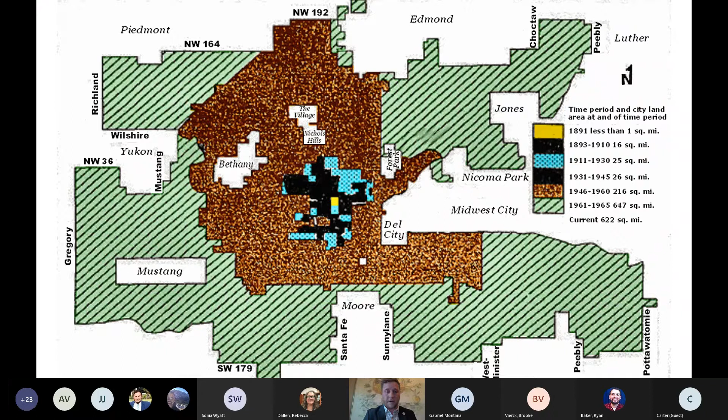So it's not an accident that we're this big. Apologies for the pixelated old graphic, but this is one of the best ways I've found to show that we grew at a pretty fast rate, particularly in the 60s. We started as that little yellow dot in the middle, and due to our tax structure, which forces cities to rely on sales tax or consumption as a primary revenue source, we reached out and gained more than 400 square miles. We added an area bigger than the city of Fort Worth over about four years in the 60s, in order to preserve that tax base for the future and ensure enough revenue to keep up with city services in a very fast growing city.

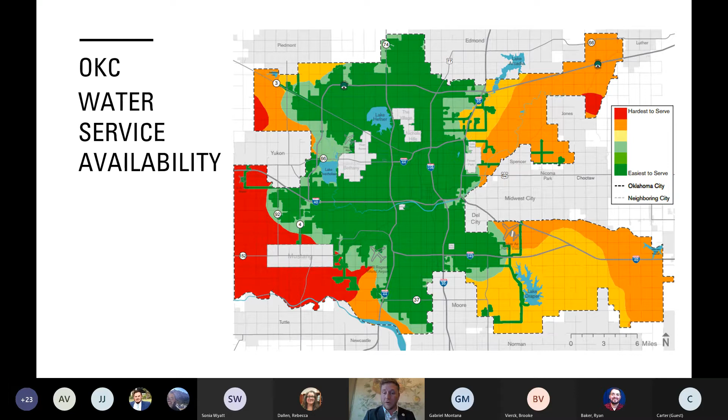This is just showing that information in a different way. Our population density increased to a point where we needed to expand the boundaries, and then continue to do so again, to preserve that tax base. These are really important features, but they also created challenges. It's a positive thing for development, having ample land where people can live on various sizes of lots in different lifestyles they prefer, whether in a rural area or a very urban area within Oklahoma City. But it does present challenges, as the red and orange parts of the map show. It's not easy to provide basic city services to that entire footprint, so with more development happening on the periphery for a variety of reasons, it definitely stretches those resources.

It's important to note how we get our water, tying into availability. We pump water from hundreds of miles away to make sure our population centers have enough, both within Oklahoma City and for the general metro area. It's a very energy intensive function, and in fact, one of the most energy intensive functions of the city is pumping and treating water. So having energy efficient operations is always preeminent, and having clean water available for drinking is especially important.

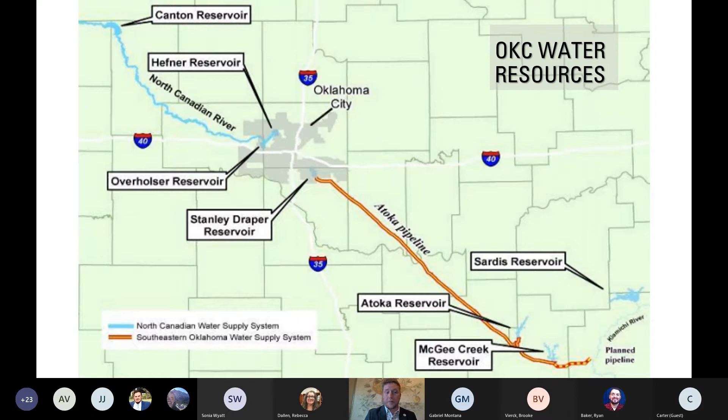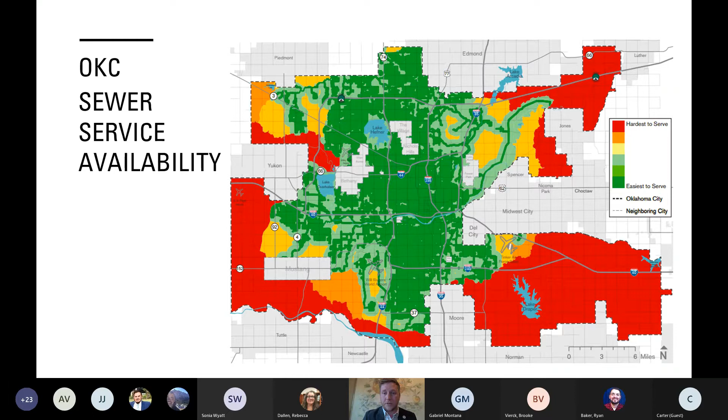Our water resources are not only concerned with pollution that happens within the city, but pollution across the state and the state regulations that guide that. On the other end, our sewer service is arguably even more difficult to reach in the other parts of the city. In those red and yellow, orangish areas, development is happening and a lot of septic systems are going in. A high concentration of those without proper education and maintenance can present very challenging water quality issues in the future. These are things we're aware of, monitoring, and want to be sure we address going forward.

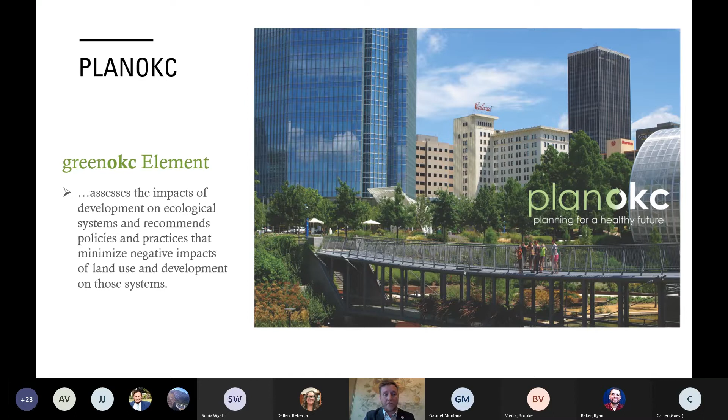These maps came from Plan OKC, the city's first new comprehensive plan since 1977, adopted in 2015. It set forth broad ideas about development and how it impacts our ability to provide services. The Green OKC element in particular we call out, because our office is mentioned specifically in terms of addressing some of those policies. We're also undergoing a larger code update, which I'll reference later with more detail, to help make our municipal codes more consistent with the vision of Plan OKC.

We chose to call this Adapt OKC partly because Sustain OKC was already taken as an element of Plan OKC, but mainly because adapting is a dynamic process. We're looking to constantly improve and refine our approach, not just sustain the resources we have, like clean air and clean water, for future generations, but create conditions where future generations can thrive by adapting to changing conditions.

To underscore the importance of having a plan like this, Moody's Investors Service issued a white paper in 2019 noting that without one of these plans, it results in greater state and municipal debt to finance recovery and adaptation to an increasing number of very high dollar events. These are billion-dollar climate disasters that have happened within the state of Oklahoma, and the trend line is going up, meaning more events that cost more money.

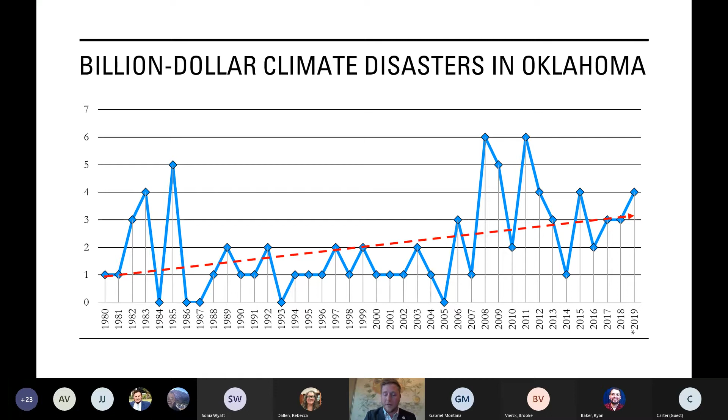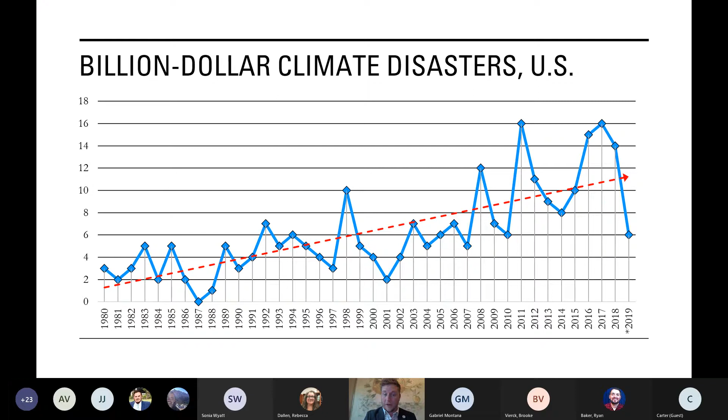I have specific examples of those coming up in a few slides, and I'm sure most of you on this call have these top of mind if you're from here. But it's not just a challenge for Oklahoma, it's becoming a challenge for the entire United States, a trend happening because hurricanes, straight line winds, drought, and even tornadoes now occur in areas where they typically don't, and very damaging tornadoes at that. We're all reaching toward that same pot of recovery money, both to build our communities stronger as a preemptive measure and to recover. If more of these keep happening without proper preparation, it could create very challenging conditions for each state trying to recover on its own.

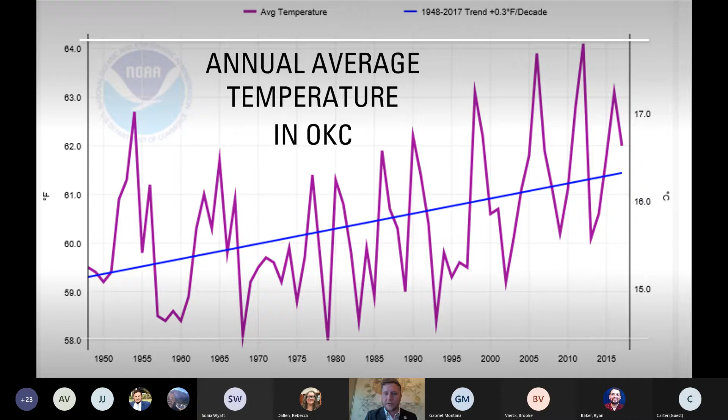But here, the report that the city was provided shows that we could have a range from anywhere from 2.6 degrees to 5.2 degrees increase in the high emission scenario by mid-century.

And so what this translates to is a number of days that we reach more than 100 degrees, or extremely hot days. We could see somewhere between 20 and 30 more days, another month of extremely hot temperatures.

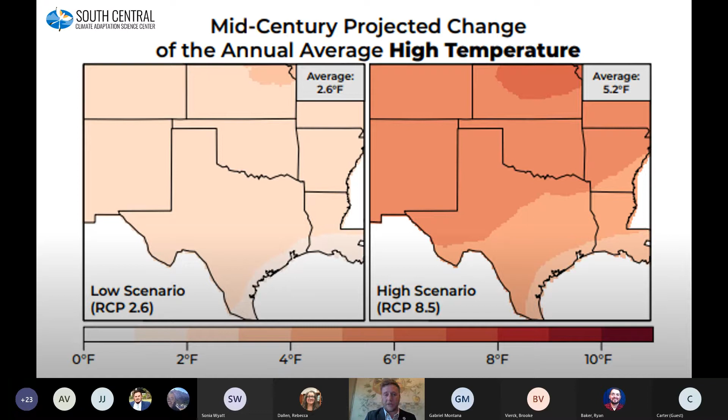And so that affects water temperatures, that affects our drought conditions if we're not getting precipitation at the same rate. And so that becomes a very challenging situation to keep up with.

It increases demand for electricity, causes hazardous conditions for people working outside. And again, this is just the translation of that to the number of days. So they're looking at somewhere between 15 to 30 plus more days of temperatures greater than 100 degrees.

So again, it's important to note that an increase like this doesn't mean that we'll not have any cold weather, as evidenced by last February's Arctic snap, but we do expect to see quite a bit more extreme record-breaking heat and longer, drier summers.

With that, I don't have a slide here for precipitation, but they're projecting about the same amount of annual precipitation. However, that's going to be underscored by being spread out in different parts of the year, and it may happen in more inundation events. When you have a warmer atmosphere that can hold moisture, it can hold more of it for longer, and then it all falls at once.

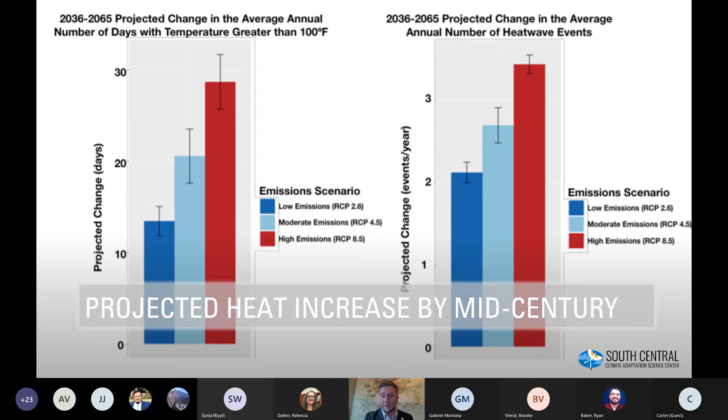And so those are things that contribute to the other primary hazard that was identified going forward, which is flash flooding. And again, water quality issues and certainly floatables associated with that. So I mentioned the impervious surfaces and parking lots being a giant contributor to that.

We have a tremendous amount of impervious surfaces in our city. And part of that, one policy mechanism that contributes to that, is our minimum parking requirements for new developments.

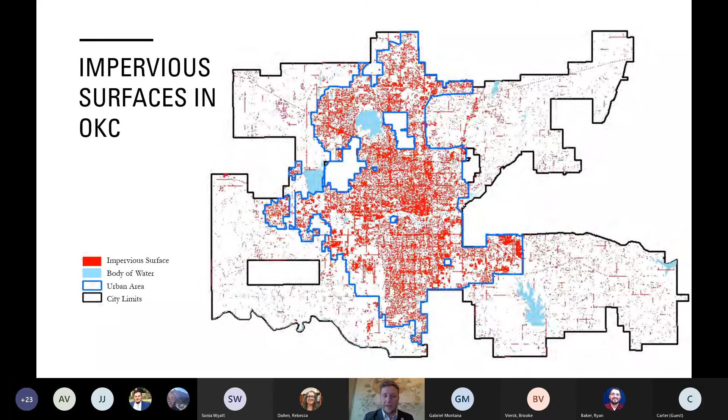So everything has to be built for that Black Friday day. And then the rest of the year, the parking lot is sitting there largely empty and contributing to both the urban heat island effect and flash flooding and stormwater runoff that definitely contains contaminants.

I'm sure most of you on the call are probably familiar with the terminology of urban heat island effect, but it's effectively where the temperatures in an urban area with a lot of pavement, a lot of buildings, rooftops, all these things that are absorbing heat and thermal energy throughout the day, slowly releasing it throughout the night. So also increasing the temperatures at night, but it also affects suburban residential and the periphery as well.

So as our urban and urbanized footprint starts to grow, so does this heat dome that can range from anywhere from 5 to 10, or 15 to 20 degrees warmer in terms of how much warmer it feels.

So again, people waiting for buses, vulnerable populations that are particularly sensitive to heat - those are things that we want to be aware of. And other cities have started to make moves on things like cooling centers and things that can be accessed by the general public to seek relief in those days.

And again, there are people in our community that don't have or can't afford air conditioning. And you can't imagine living in Oklahoma for very long without air conditioning. So being able to support everyone that lives here throughout these conditions is going to be a very important feature.

So the first chapter of Adapt OKC that I'll be talking about is the natural and built environment chapter, where we do talk quite a bit about stormwater quality issues, low impact development, and our natural resources.

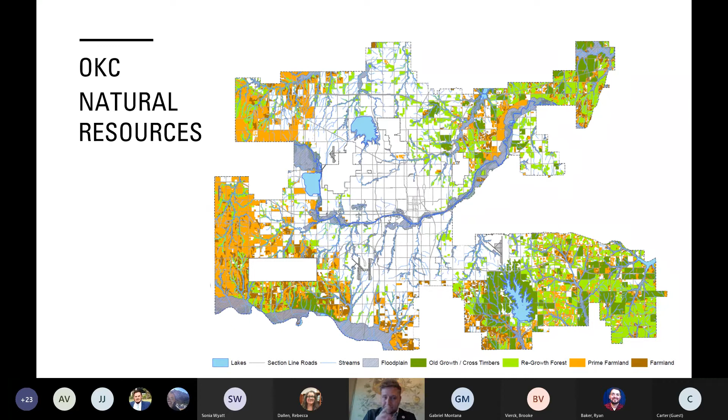And so this changes the way that water behaves on the land and contributes to higher volumes and a stronger velocity for our stormwater. So that creates challenges for engineers to deal with, particularly site by site, but also on the city side. So as we start to see more of those inundation events and flash flooding, again, we have examples here of just large parking lots.

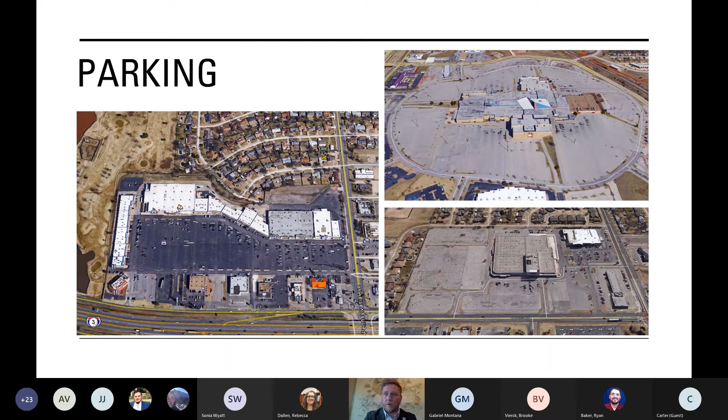Some of these you may recognize. The uses have changed from when they were originally built, but that didn't instantly change how big the parking lot was or what it's contributing to the community. So these all exist, and hopefully in the future some policy adjustments can be made so things are right sized, and developers can have other options too, so it's not just hard impervious surface as the only way to do parking.

And again, this is probably preaching to the choir, but nutrients, over fertilizing lawns - this is a huge thing already with outdoor irrigation, and sometimes with irrigation that's not well monitored.

One thing I'd like to point to - I know you all heard from Mallory Gotcha this year with the Squeeze Every Drop program and water conservation, but this is just an opportunity to point out the resources they offer. I believe OSU Extension is involved in these as well, to conduct basically a checkup for sprinkler systems. So businesses, residents, everyone's encouraged to do this.

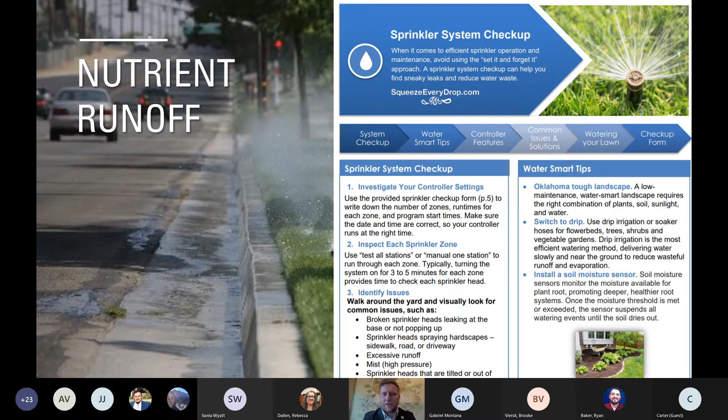But again, a very important consideration, given that heavy rainfall events and flash flooding also contribute to these, but irrigation does it more regularly. And so when you have a tremendous amount of heat, you have really long, hot days.

And again, this is something you're all very familiar with, but the blue-green algae blooms - it's probably a dirty word in this forum to even bring up. But when you have runoff from polluted areas or with a lot of fertilizers, and then you have long, hot, dry summers, which we're projected to have more of, you can have more conditions that are right for blue-green algae blooms. These can create health issues, recreation challenges, and also impact wildlife.

So the contribution of these large parking lots, connecting with a large amount of heat and more stormwater runoff from flash flooding events - we have some conditions coming in the future that we may want to be prepared for.

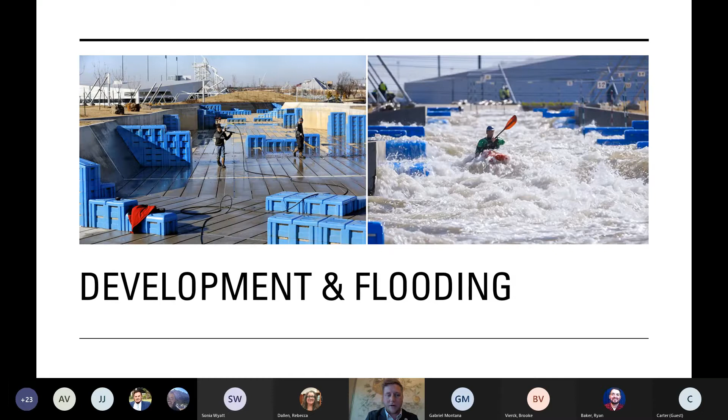Water flows normally without these big blocks, but we put them in there to create whitewater conditions. The same thing happens in the real world where we have too many impervious surfaces or high concentrations of them, so it moves the water faster and creates much more dangerous conditions. In fact, so dangerous that the fire department uses this as swift water training for some of their firefighters. So it's an analogy that stands there.

I mentioned low impact development. This is a concept that we've talked with Derek about quite a bit, and we're looking at ways we can both provide guidance to private developers and look at ways they can be incorporated into city projects, to help not just prepare for what we're experiencing today, but what's to come in the future. So a whole menu of options here.

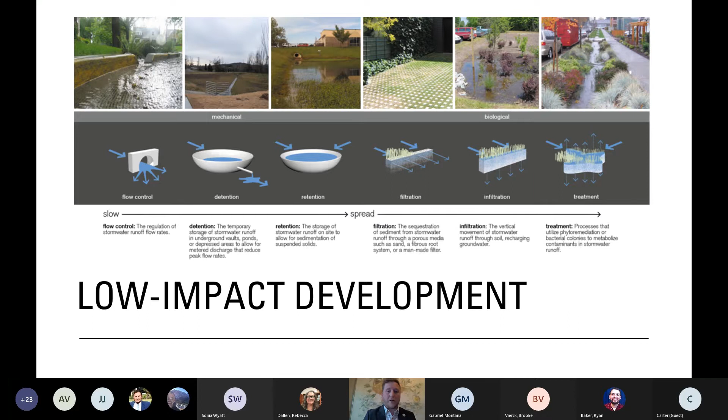It's not just rain gardens, and it's not just using pervious paving and things like that. It can be other strategies of detention or flow controls, infiltration - just wherever water can be slowed down and then allowed to filter using the plants to help clean it. This can help us stave off some regulatory challenges that can become very costly and time consuming, but then also keep our waterways healthier by not over inundating them with nutrients.

Low impact development, in fact, has been something the city has talked about for quite a while. We have dating back to 2009 with the Green Infrastructure Task Force, which members of Public Works and several other departments and external agencies were part of. Just highlighting from this some of the primary issues and concerns identified in that report - it pointed to stormwater discharges, untreated runoff directly connected to storm sewers, these types of challenges, and that still stands today. So we're going to be looking to work together to address those, and then expand the options developers might have and that the city would have in how we deal with stormwater.

A good example, parks down at Kitchen Lake incorporated something where they have a nice little rain garden / bioswale with an under drain, where all of the water from the circular parking lot there - and again, this is at Kitchen Lake, so just off the photo there is an actual lake where people can go out fish and interact with all the things.

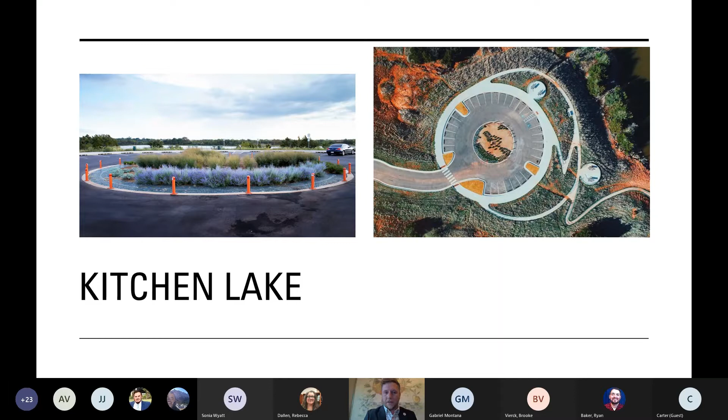But the important part is most of them are driving there. This is not exactly a place you can walk to very easily—it's a little bit further south. But when they do drive, the cars are at least not contributing directly to runoff straight into that lake and causing other challenges. So again, a really good example of something the city's done that we hope to see more of.

Other primary considerations from the Natural Built Environment chapter that directly relate to stormwater is, of course, our tree canopy—the expansion and preservation of what we have. And as we start to see these weird unseasonal ice storms, like the one last October, that damaged a tremendous amount of trees due to all the vegetation that was still there, it's important to know what the status of our tree canopy is.

One study funded by the Oklahoma City Community Foundation and Oklahoma Forestry hired Davey Resource to do an iTree analysis. This only covered about 3.23 square miles within parks land, assessing 134 different city parks. In the grand scheme of things, this is a very small area out of a 621 square mile city. However, the benefits those assessed areas are providing are tremendous—the trees are providing upwards of $43,000 in environmental benefits, both from the carbon they sequester and the stormwater, totaling up to about 3.6 million gallons of avoided runoff.

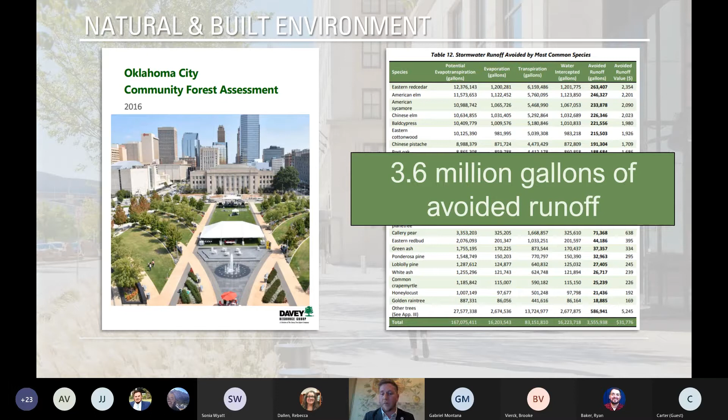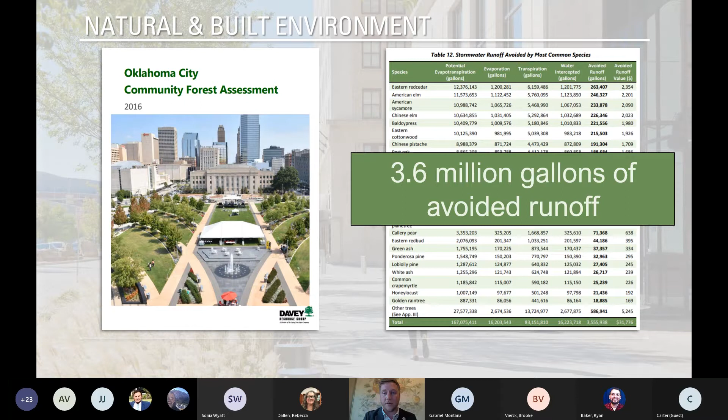Trees can definitely be used to stave off urban heat, providing shading and cooling areas, but they also serve a very important erosion control and stormwater purpose, not to mention the carbon avoidance they sequester—totaling about the equivalent of 5,000 automobiles, and again that's just from about 3.2 square miles of our city's trees that were assessed.

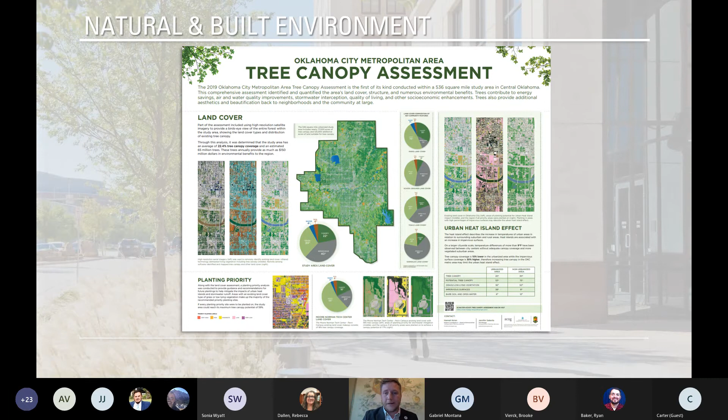A much larger assessment also took place, funded by the Oklahoma City Community Foundation and Forestry Services. This report looked at about a 536 square mile area covering most of the urbanized area in the Oklahoma City metro, including a good portion of Oklahoma City and a tremendous amount to the north and south, so that we can look further at the impacts of where our tree canopy is and where our urbanized area is growing.

This 536 square mile area has an estimated 64.7 million trees, valued at $35 million, providing an annual net reduction in atmospheric carbon of 133,865 tons—equivalent to about 281,000 barrels of oil consumed, the benefit that these trees are providing.

You can look at certain aspects of the data within these reports. Again, ACOG was involved in this study and helped put it together in a very digestible manner, with GIS layers and things people can interact with to look closer at the hotspots where trees aren't—where there's a lot of impervious surface.

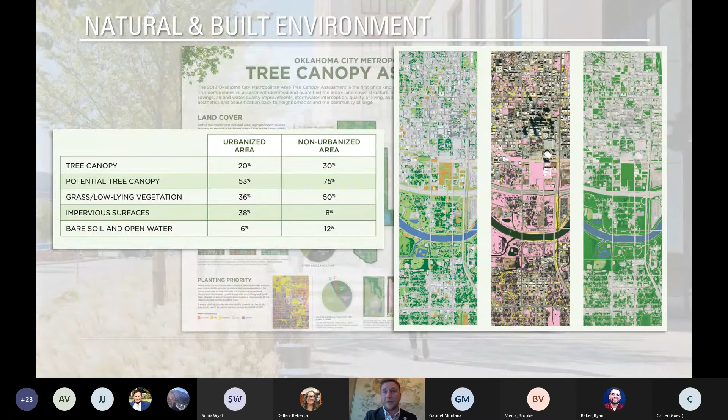Drawing your attention to the table on the left, when you compare the urbanized area versus the non-urbanized area, we have 10% less tree canopy but 30% more impervious surfaces in the urbanized area—which makes sense, that's what makes it urbanized. But that does say we have a good amount of area we need to be looking at and potentially addressing, or providing additional tree coverage.

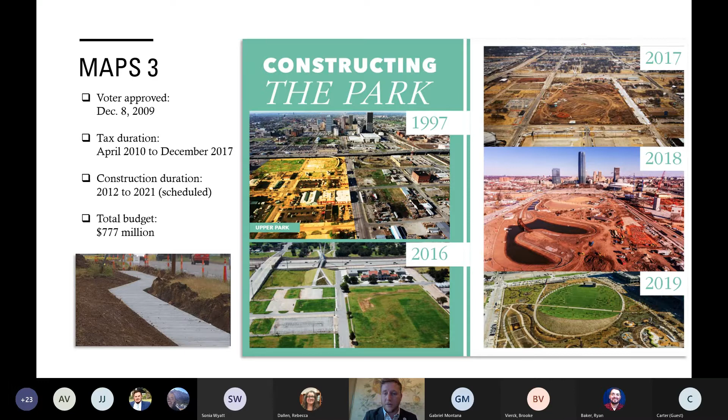Of course, MAPS 3 included a substantial investment in sidewalks to connect other pedestrian gaps. But again, for the purpose of this presentation, the importance of this park is huge—huge for being right in the middle of downtown, one of the most urbanized areas of the city.

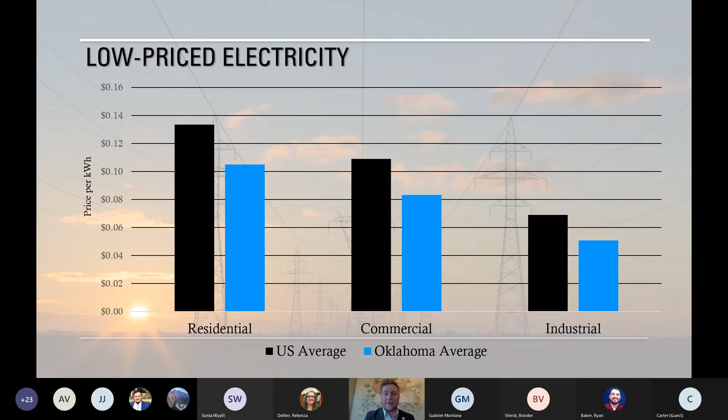So again, heat plays a big role in stormwater runoff and some of the challenges it creates. But it also creates challenges for electricity and our electricity demand. Despite having some of the lowest electricity prices in the country, we use more per capita than the national average.

So the low price has incentivized more use. Demand and prices are both expected to increase in the coming years. There's cost recovery mechanisms going to the Corporation Commission that will increase the price of electricity, but also we expect overall demand to go up.

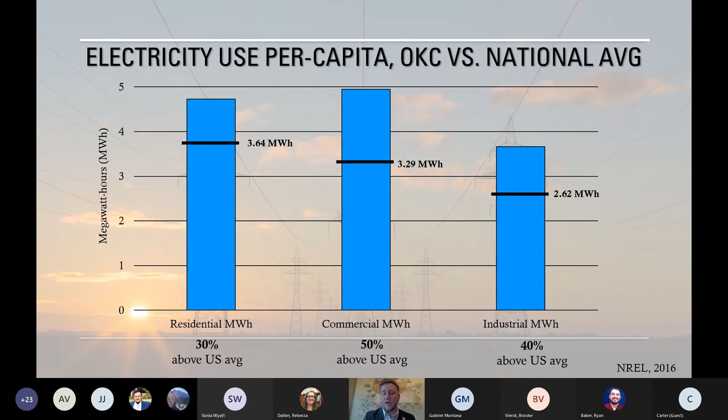So if we're already using more per capita than the national averages, that's likely going to increase with longer, hotter summers. One study showed that electricity demand for air conditioning increased approximately anywhere from 1% to 9% for every 2 degree increase in temperature. So again, if we're talking about a whole other month of 100+ degree days, you can see how that adds up pretty quickly.

Some things that we're looking at in the plan to help mitigate these challenges would include both existing buildings, public and private, new construction using building codes and energy modeling for new construction of city buildings, and then just some operational changes that can be incorporated to help lower that demand and prepare for these more extreme conditions.

Because as we move forward, the story I like to tell, or the example I like to give, is an out-of-state builder comes into town and builds something super fast and cheap and quick and doesn't have to make it energy efficient, and then leases it out to an Oklahoma small business. Well, the inefficiencies of that building are coming out of the bottom line of that Oklahoma small business. And so it's in everybody's best interest to build more efficient facilities going forward.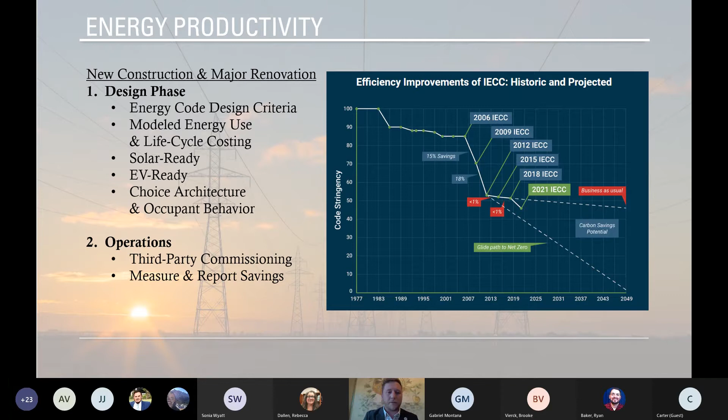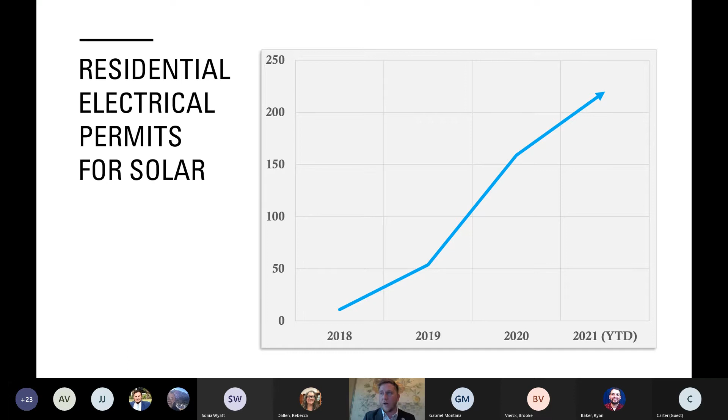So there's not a tremendous amount of information related to consumer protections and things that go into projections when a solar installer can come in and they can juke the stats just like anybody else selling something can. And again, that's not something we're hearing widespread reports of, but we definitely don't want to hear that. And so one program that we're looking at is a Solarize program that we've seen done in several other cities.

In Oklahoma City, or excuse me, in Oklahoma by and large, where it is, we receive wholesale rates rather than retail rates whenever you're selling things back to the grid. So again, we see this as a very big opportunity for education and outreach about solar, how it works, how contracts work, and the importance of making sure that just because something sounds like a good deal, we want residents to understand fully what goes into that.

But again, there's more information to come on that, and that will probably be something that launches in 2022 with the help of a couple of partners and several community partners. So more information to come on that piece.

The next chapter is waste reduction that I'll touch on. And again, this chapter, we look at the strategies that will extend the life of 3 active landfills in Oklahoma City by increasing waste diversion and positioning Oklahoma City to work towards a circular economy that reduces waste and fosters space for new and expanded post-consumer industries.

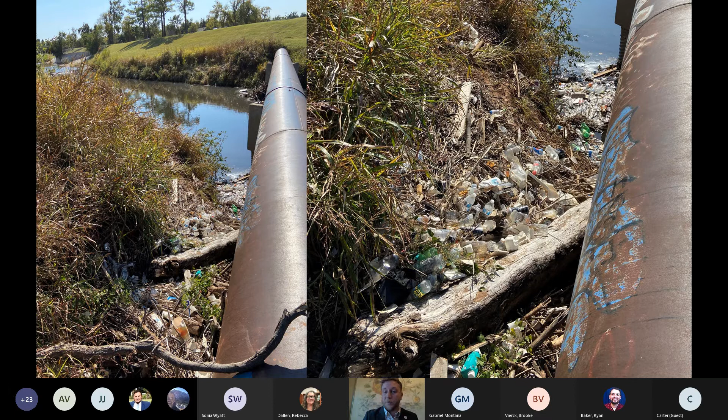However, the things this regulates—criteria pollutants like oxides of nitrogen and volatile organic compounds—largely come from tailpipe emissions. When those are present with sunlight on hot, windless days, it creates ground level ozone, or smog, which is basically what we're trying to avoid. It creates terrible health conditions for people with respiratory illnesses, and it can also be an economic challenge for the city that I won't go too much further into.

Again, no surprise, but if we look at CO2 emissions from households and tailpipe emissions, it's largely driven by development on the periphery and people commuting into work.

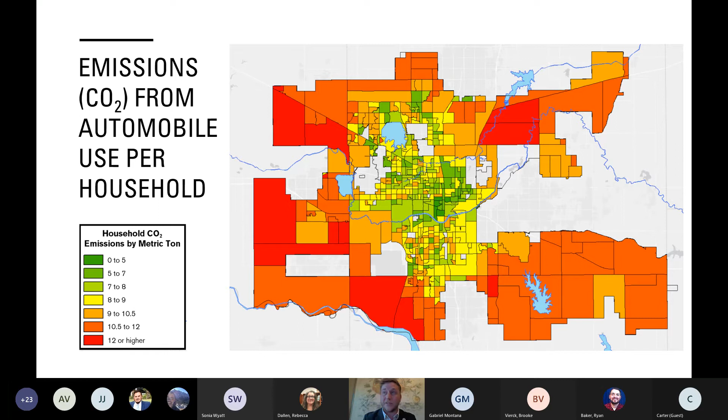All of our commutes are, 80% of them, single occupancy vehicles. So looking at alternatives like Bike Walk OKC, the city's first bicycle and pedestrian master plan, we're encouraging people who can and are able to do so safely to bike and walk, with protected infrastructure so people feel more safe on certain corridors, and connecting those plans together.

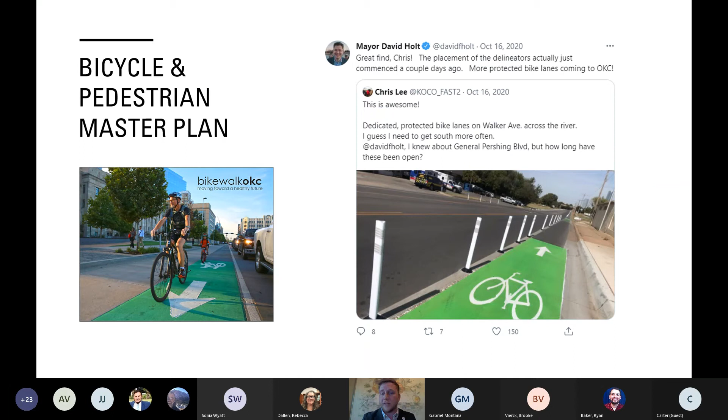And then also alternative fuels. We don't foresee a future where Oklahoma City is entirely reliant on transit, biking, and walking. People are going to continue to drive. But if those single occupant vehicles could be low or no emissions, that would also help us remain in attainment and not reach that threshold.

So Embark's investment began in 2016. That's the transit agency here. They have a goal by 2025 to replace its entire bus fleet with compressed natural gas or electric buses. They already have 21 CNG buses and plan for 8 more through a federal sustainability grant from the FTA. Embark is doing really good things for the community.

And again, electric vehicles - there's a lot more to come on that from the bipartisan infrastructure bill, and a tremendous amount of money coming from the federal government to both states and cities to invest in charging infrastructure and things like that.

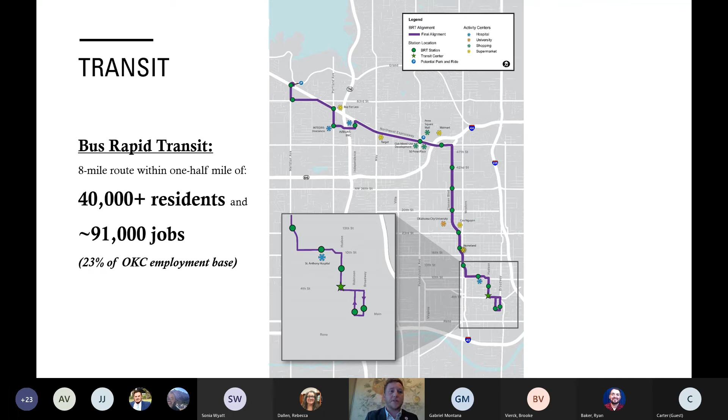Other investments the city's making: bus rapid transit, which is going to connect 40,000+ residents to about 91,000 jobs. It's an 8-mile route to begin with, and it's going to have great interactions with bike lanes, making safer walking and pedestrian connections to these bus routes along highly traveled corridors. MAPS 4 is bringing expansions of the BRT route to the northeast and south, at least looking at those. The more reliable transit options we have, the better off we're going to be.

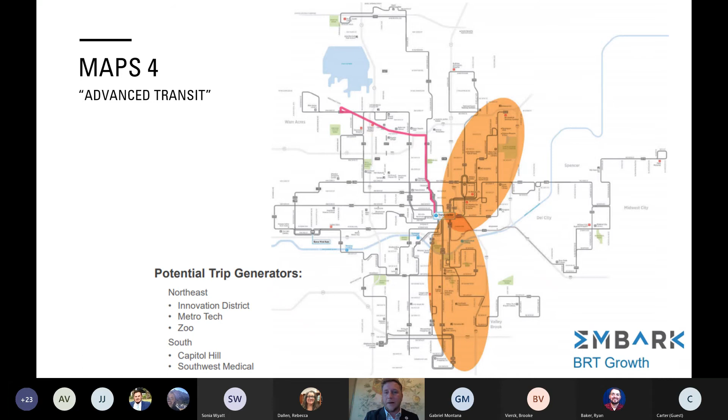What a great presentation, that was fantastic, I was glued to my screen. Thank you so much. I don't see any questions at this time. We've got a thank you from Derek. So good job. We'll keep an eye on chat here in the next minute or so, if you don't mind hanging out for just a little bit longer, Tio. Sure, okay cool. So if anyone does have any questions, please do type those into chat.